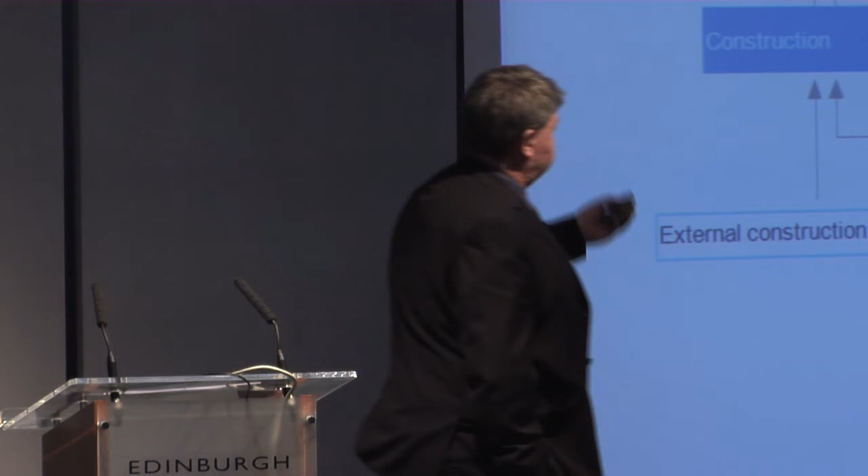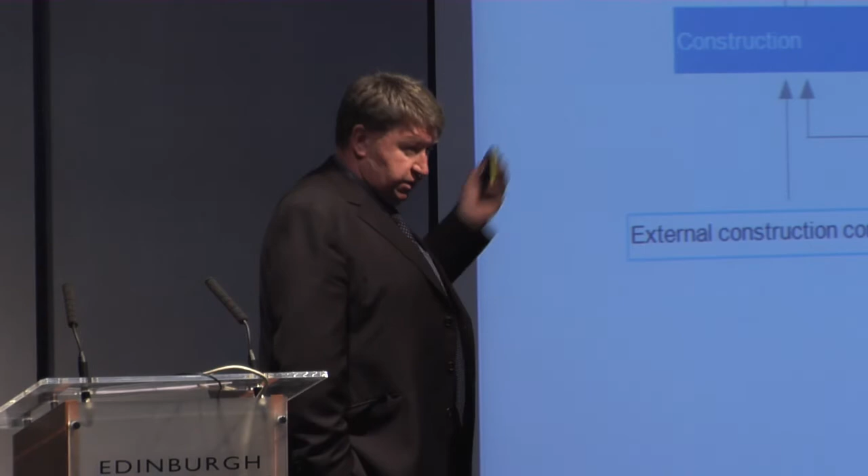And this is how it simply works. This is a simple engine of how Skanska works. Construction, as I said, is 80% of what we deliver. The one good thing about construction is it provides cash, and instead of giving all that cash back to shareholders, we invest it in the 3 development businesses: commercial, residential, and infrastructure. That in turn provides internal contracts for ourselves, so it's like a large engine. We also have external construction contracts which feed the engine. Unfortunately our shareholders also want dividends, so some of the cash goes out. It's a very simple model, but as you can see, we're not only a provider of assets, but also a developer of assets.

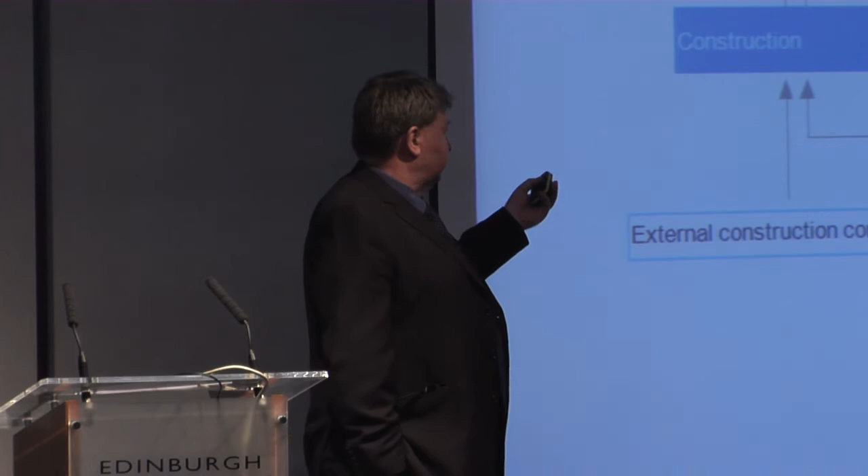Quick flick through some of the large projects we're involved in just now. This is a very quick flick.

Apple's new headquarters in California started 2 years ago, valued at 2.4 billion, architect Norman Foster, due for completion in 2015. A huge focus on energy provision there and actual sustainability. I'll come on to some of the actual methods we use in detail in a few minutes.

As I said before, PFI, the use of private finance in construction, can sometimes be controversial. Sweden decided to embrace PFI, and instead of picking a small health centre, decided to build Europe's largest hospital at 1.2 billion sterling. That's underway, due for completion in 2015. It will be a LEED Platinum project, a huge focus on sustainability, a lot of use of prefabrication, biomass CHP, and it is 17,000 rooms, so a huge focus on construction technology and how it can improve sustainability.

A building we all know, it's the Gherkin. I wish I had a pound for every time that was shown on television. Completed in 2004, an iconic building in the centre of London. Øresund Crossing between Denmark and Sweden, completed in 2000. A little closer to home, the Scottish office down in Victoria Quay. And our last project, the State Hospital down at Carstairs.

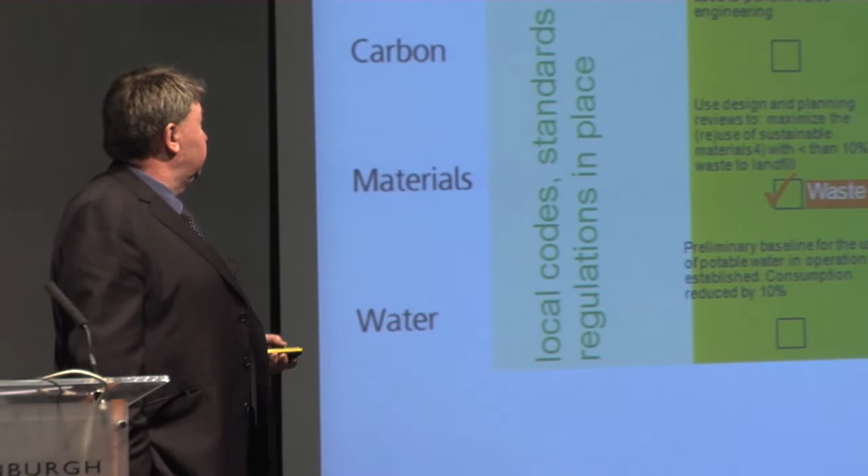So, in terms of measuring sustainability, how do we measure it? We've introduced globally the Skanska colour palette, and it works very simply. We've chosen 4 areas to concentrate on: one's energy use, 2 is carbon, 3 is materials, and 4 is water.

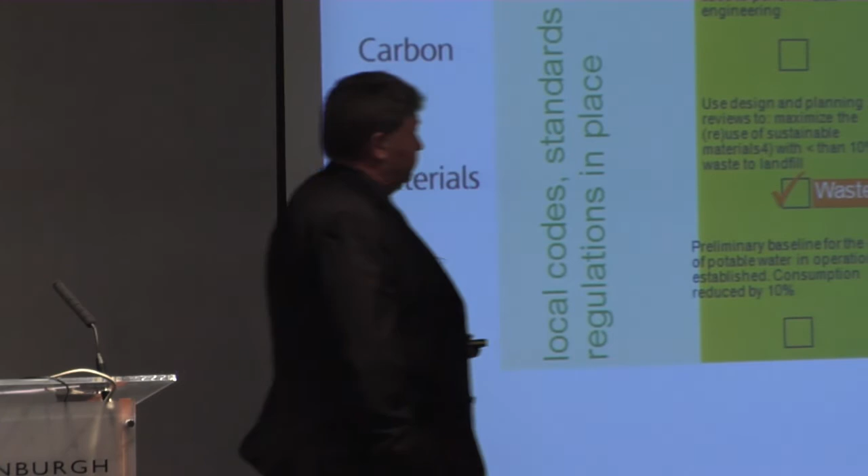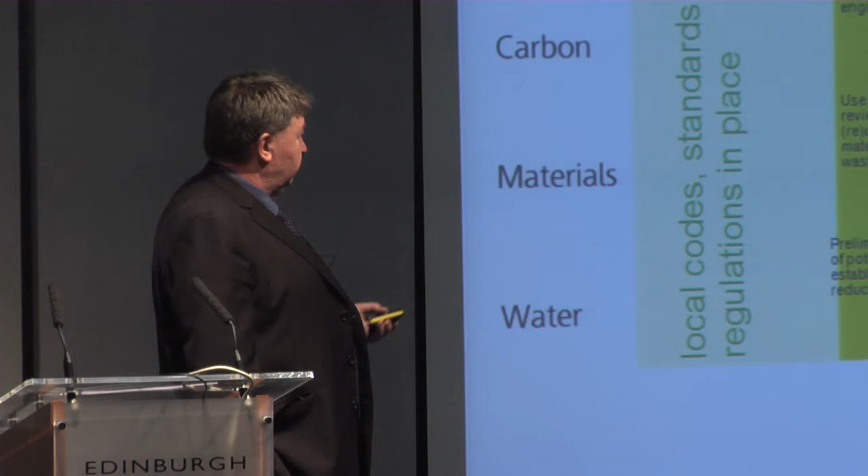If we are compliant and just meet local legislation and regulations, then we are at the left hand of the scale, which is vanilla. Where we are trying to get to is the right-hand side, which is deep green: net zero primary energy, net zero carbon construction, net zero and sustainable materials, and so on. What we do now is measure each one of our projects across these four metrics.

This is a project down in Bristol Schools, where we have achieved better than compliance on the building envelope, better than compliance on waste management, and much more than compliance on actual water usage. So every project in Skanska is measured on each of these metrics. That's hugely important to demonstrate to clients and to our supply chain what sustainability means and how we can use it as a simple metric.

But in Skanska, we buy 80% of what we produce. We procure 80% of the projects that we're involved in, so it's not just down to us. We can put all the metrics in place, but what we have to do is actually educate our supply chain. And it's not just about the actual product, it's also about the process as well. It's about how we get the materials to site, the amount of work on site, and where people travel from.

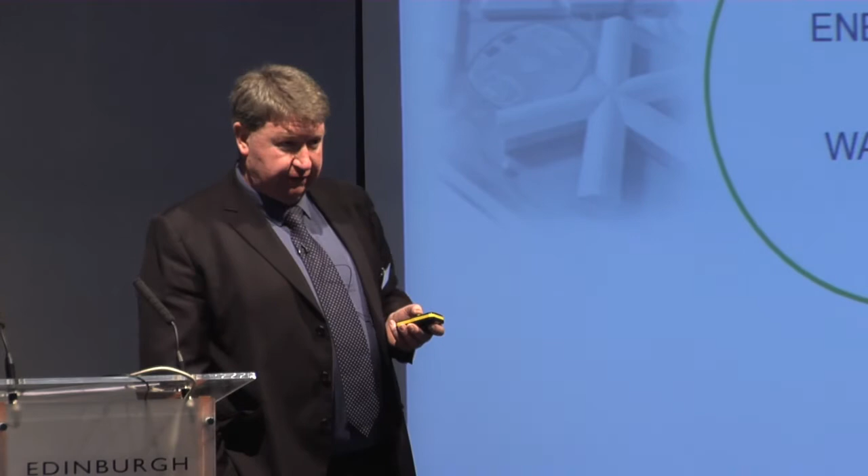On every one of our projects now, we try wherever we can to procure locally. One, it keeps the investment in the area. Two, it's good for corporate social responsibility. But three, it is hugely important for the environment as well. Why would you go and procure from the south of England for a project in the north of Scotland, with the transportation costs and all the risks of getting the materials there on time? Why not procure locally? So on all of our projects we are now trying to procure within a 200-mile radius if at all possible - employing staff and labour within 200 miles, but procuring within 200 miles as well.

It's a very serious ambition. Sometimes it means we take raw materials into the area and set up flying factories to provide the manufacture there as well. It is an ambition - we haven't achieved it on all our projects. We have a large prison in Peterhead at the moment, and an example of that is all the precast panels came from the Orkneys and were floated into Peterhead Harbour, where in the old days we would have bought them from Peterborough and driven them up the M6. Looking at it, it has cost us less money and it has actually reduced our risk.

So as I said at the start, going green doesn't have to cost money. It's about doing the simple things right. Everyone in the room will no doubt know about sustainable timber - we've always been sourcing from sustainable resources. We are now extending that to quarry products. We're looking at waste, at providing more actual waste materials on site and reusing waste materials. We're looking at recycling, and as I said before, we're looking at the local supply chain.

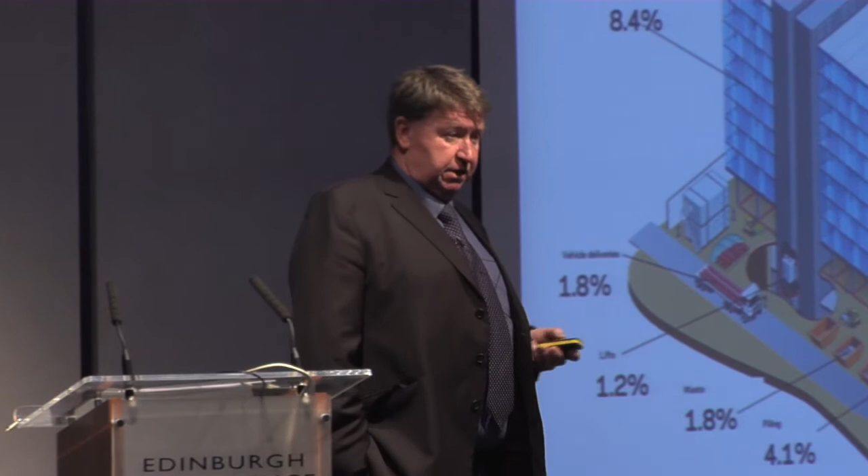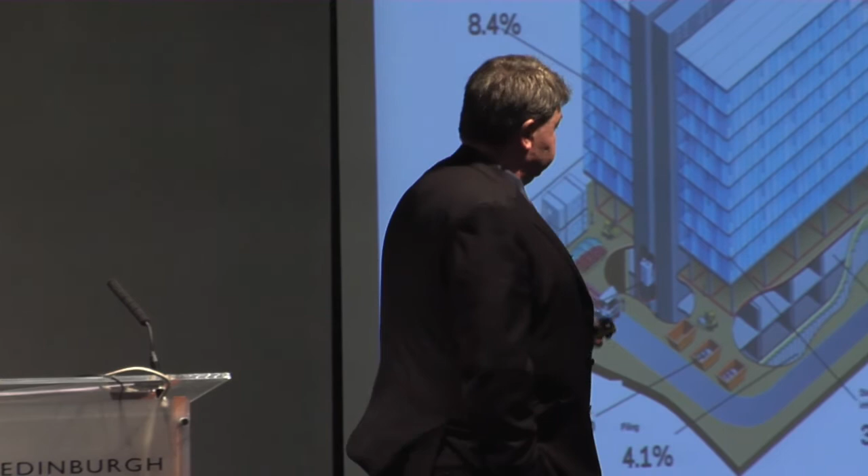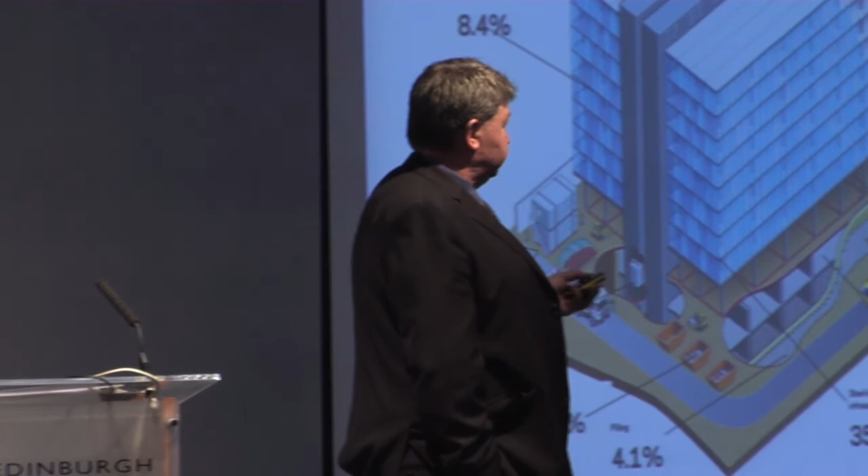Embodied carbon - this is looking at all the materials that come on site and now monitoring the actual carbon footprint. In the past we put a cost plan together; now in all our projects we are looking at embodied carbon - how much carbon is actually used to produce the materials on site. Here we've concentrated on the percentage of the total building, and if you look at the concrete, we've looked at the actual carbon produced in terms of concrete manufacture. John MacArthur's going to talk about that in more detail at the end of this session. So we're looking at the energy sources, the raw materials, and now at the total carbon embodied in all of our structures - not just carbon in production or manufacture, but carbon at source.

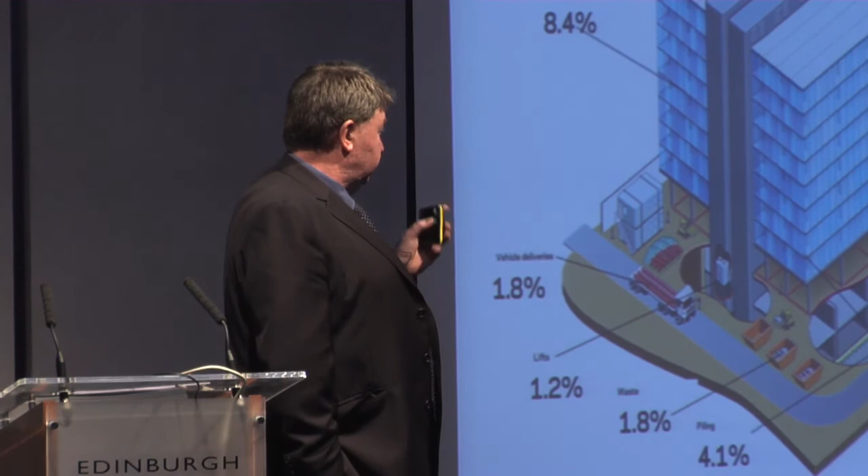So how do we move on and actually look at getting to deep green? Well, there are a number of accelerators. First thing is we have to challenge our clients.

And that is an example of actually educating our clients.

Form of contract: we have a lot of adversarial forms of contract in the construction industry. There are new forms of contract such as NEC that allow the contractor to be involved at the early stages along with the supply chain, and that's when you can make a change, make a difference. It's about getting involved day one, in the brief, in the early design, and designing sustainability in - don't have it as an afterthought.

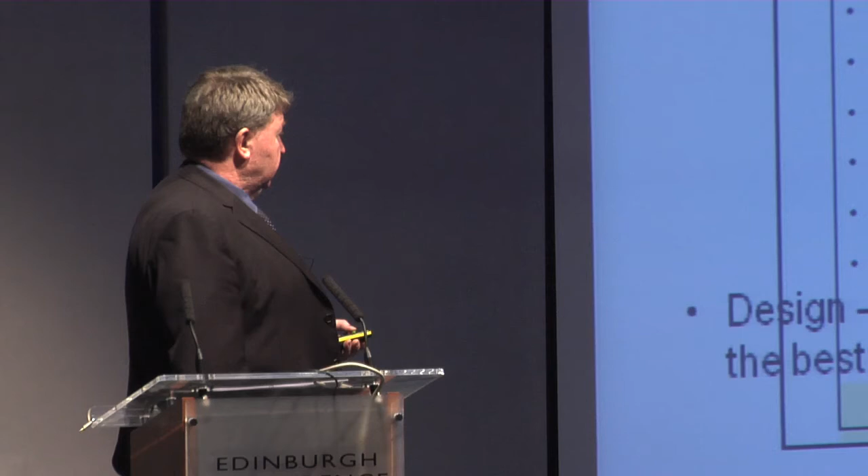And last but not least, it's about design - actually considering the local environment and using the best technology. And now I'd like to look at one aspect of that, which I think Fred's going to talk about later in a bit more detail, and that's BIM.

So what does BIM stand for? BIM is Building Information Modelling, and there are two definitions. One, it's a method to describe the building - its spaces, structures, components, materials - with essential information and properties. The model is purely a container for the information. But the other thing, which I think is more important, BIM can be described as a collaborative approach to making sure that the right information arrives at the right place at the right time.

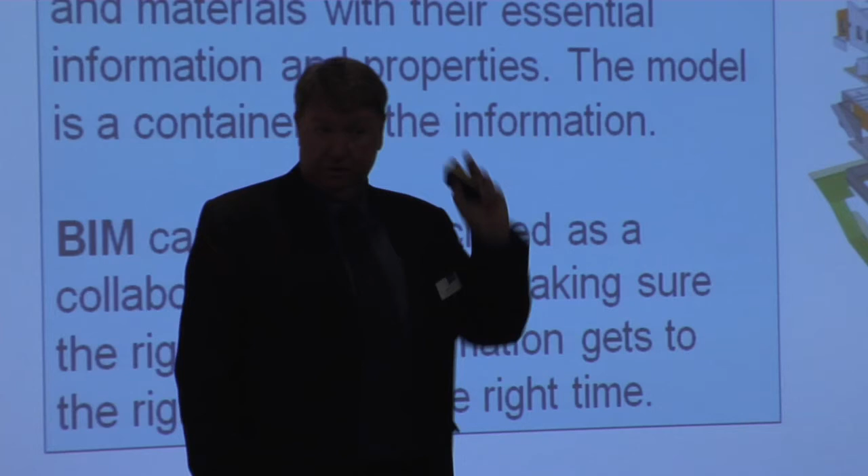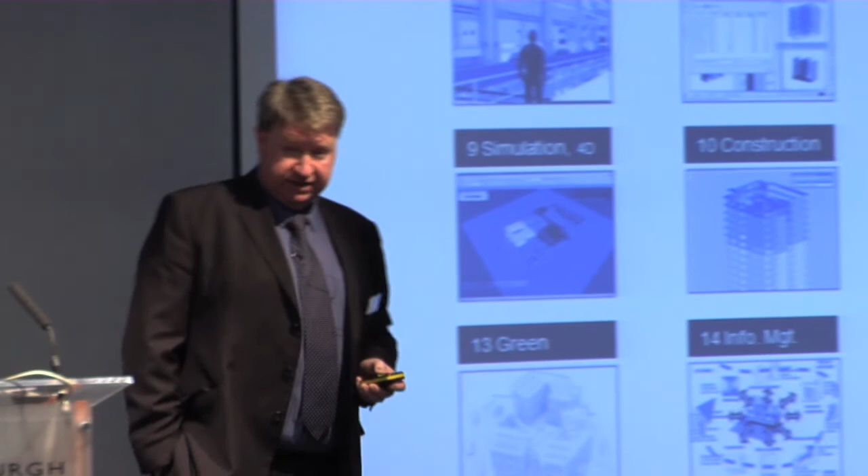Anyone have a guess in terms of BIM, how many Ds we are now working on? You obviously have 2D, 3D, now 4D. Any thoughts on what dimension we're now working on in the construction industry? Sorry? 7? Close - we're now working on 16D. That's 16 dimensions to a BIM model.

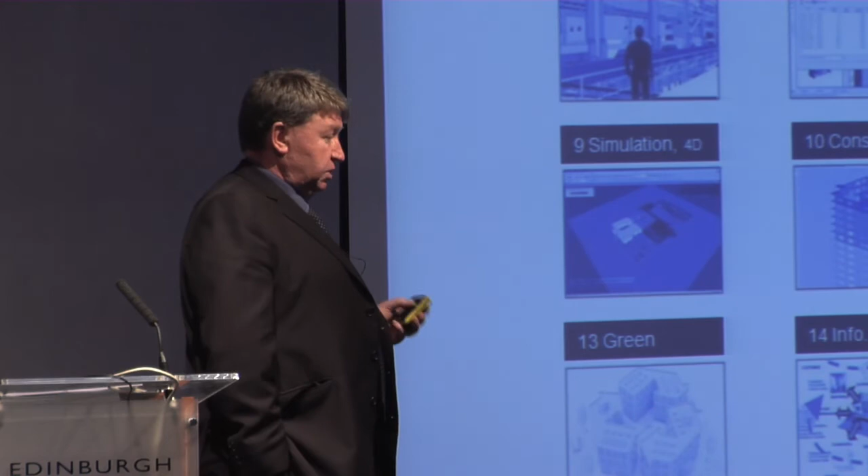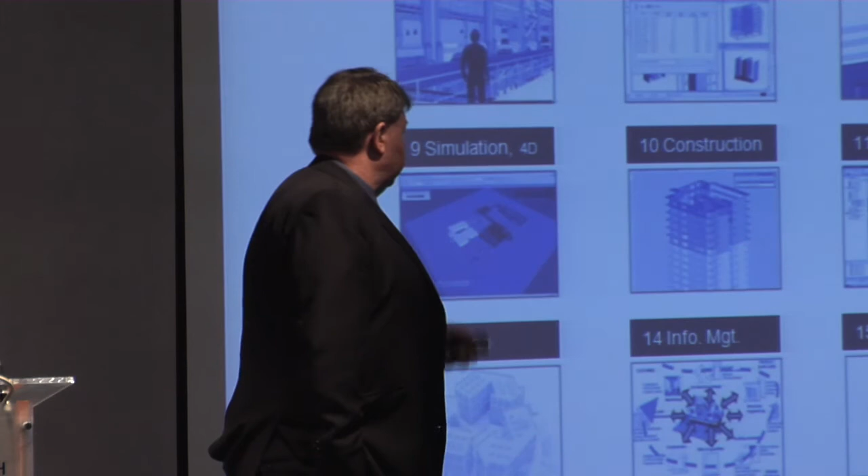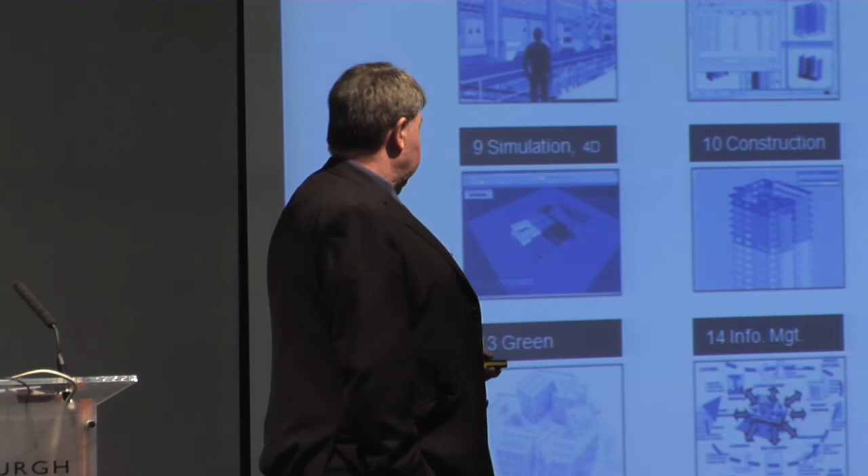So you have your base BIM model, and then you can attach to that model all these attributes. You can look at the design and how it's developing. You can look at the commercial aspects, how it's being procured, safety, clash prevention, 4D simulation, fly-throughs, artist impressions, construction in terms of buildability. But you can also look at green aspects of the building, life cycle, and FM.

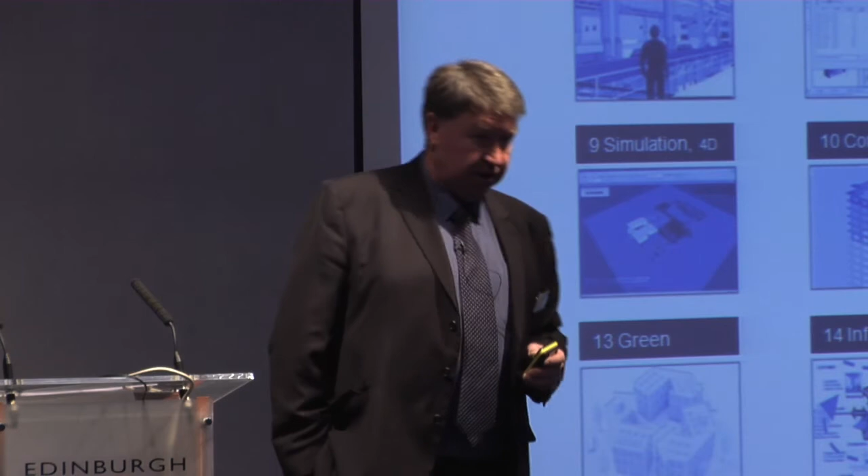On all of our projects now, we have a BIM model, and on every project we actually produce a full 16D BIM analysis. So on every project, we look at every aspect of the project using the base 3D model.

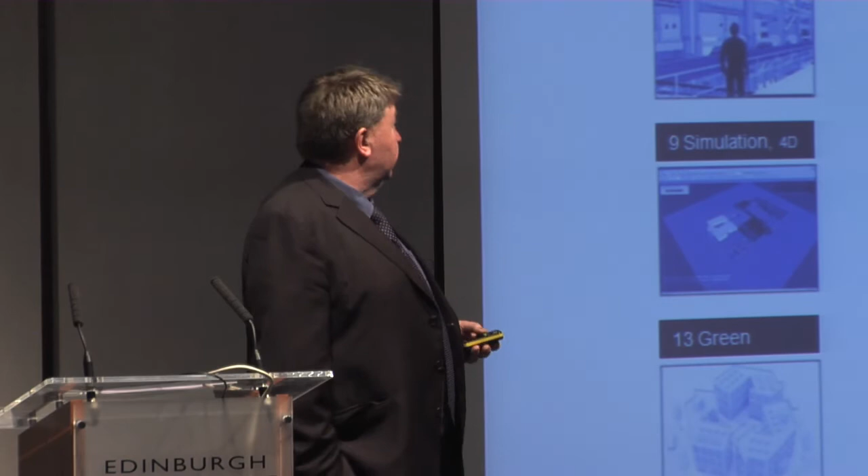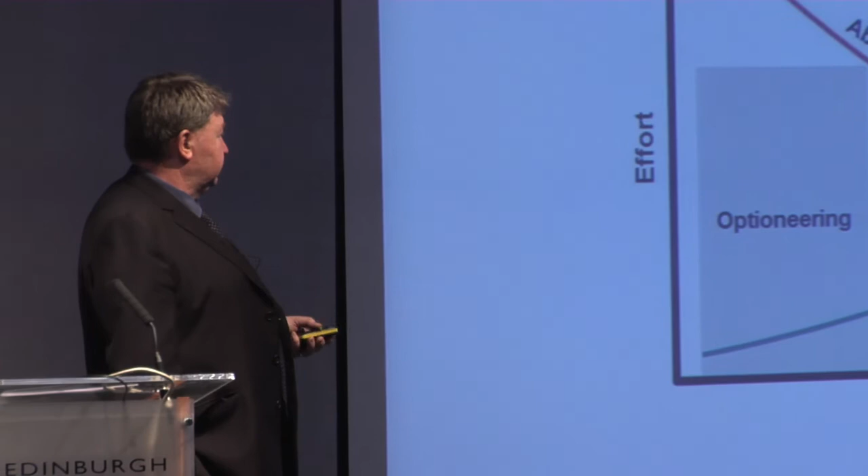Why do we do this? As I said at the start, it's much easier to introduce sustainable measures at the start of a project, during optioneering. As the project progresses, the ability to change becomes less, the cost increases, and the actual cost of change becomes hugely influential on taking it forward.

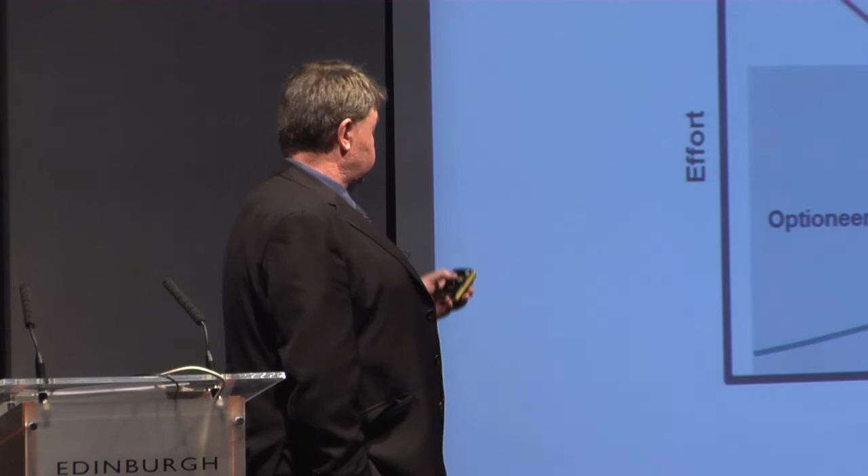So, a quick flick through how BIM can help us, and then a quick video of how Skanska are adopting BIM. BIM, or Building Information Modelling, has started to become a well-recognised term within the construction industry.

At Skanska, BIM is seen as a new way of working, enabling a structured flow of information throughout a project's life cycle. Applying the principles of BIM has proven to make a significant positive impact on many core activities on a project, from early client engagement and planning during pre-con through to design, commercial and construction management, and then operations.

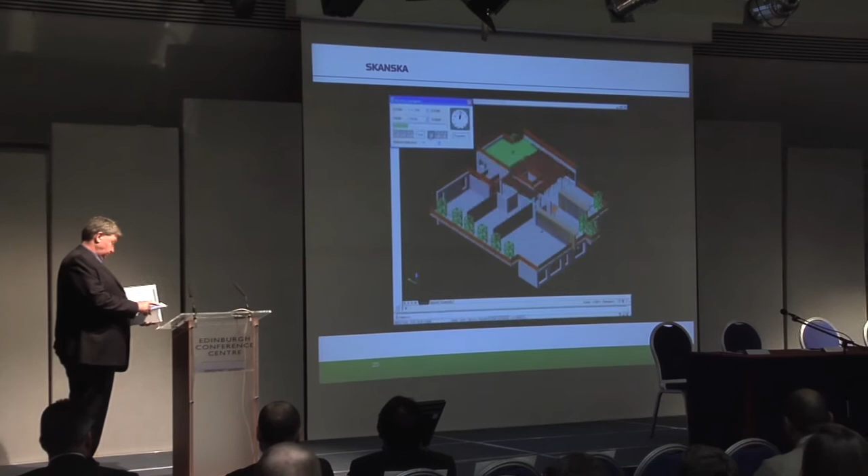The Skanska Group recognised the potential early and took the bold decision that every design and build project in Skanska from 2009 onwards should adopt the principles of BIM. The objective: to make Skanska more capable of winning and successfully delivering projects throughout the world.

Skanska UK has been seen as an early adopter of this new way of working. We have already been using BIM principles on some of our projects for a few years now, and within the UK 2015 strategy, BIM plays an important part. BIM is acting as a catalyst for change, the Skanska way.

So what is BIM to me? BIM provides us with the cornerstone for the design, planning, construction and operations of our projects. I see BIM as enabling us to advance our sustainability credentials and speed up our journey to deep green. And I believe that we are just now starting to see the benefits that BIM can bring to our projects and to our organisation.

BIM supports our aspirations to deliver our clients' expectations safely, more efficiently, more predictably, both in the construction and the whole life phases of the projects, to enable us to outperform on every job, every time.

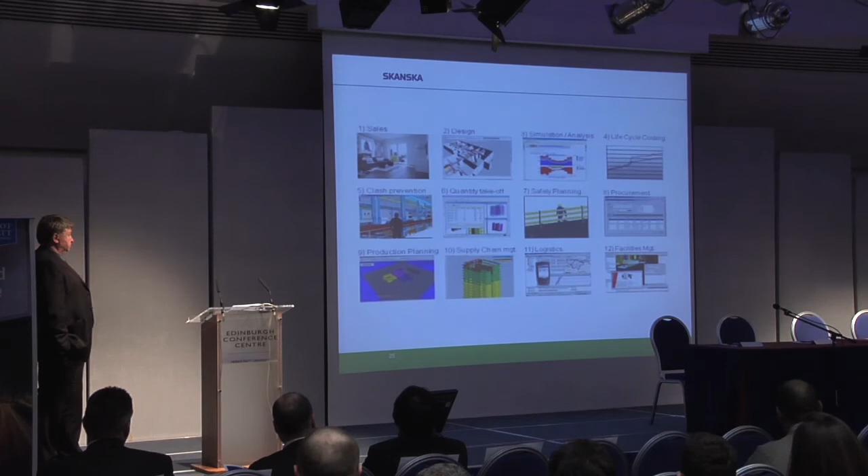At Skanska, we currently structure BIM into 12 applications, spanning from powerful visualisations that support our bids to a tool that enables more efficient facilities management. We can now start to see the first practical examples of how various applications of BIM have enabled different operational units to enhance their performance.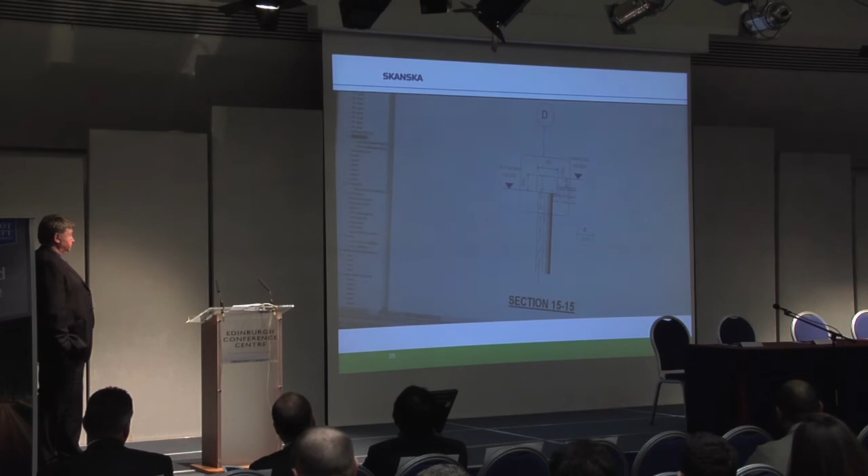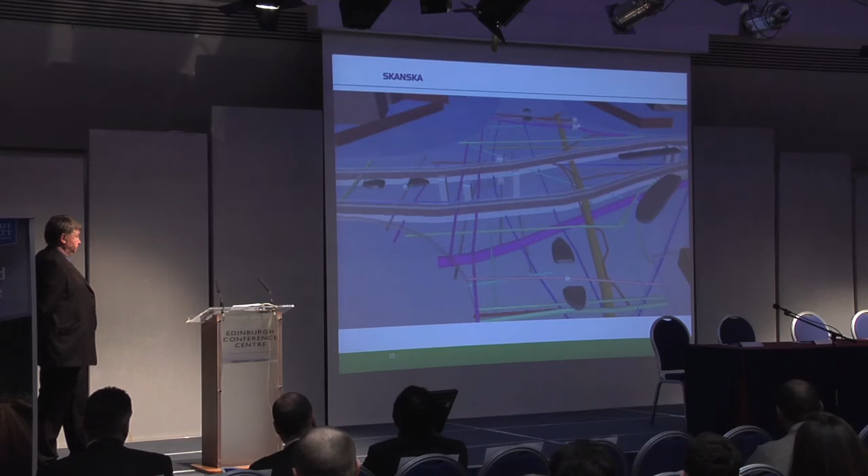The first story is from Utilities, who applied elements of BIM to a recent bid for a complicated services installation along a busy road just west of London. Using the latest survey technology, they were able to scan the ground and capture accurate information relating to existing services. The existing services were then converted into BIM data, combined with the proposed new services, and the scheme was optimised for cost, construction works, clashes, logistics, etc. The model gave them the opportunity to present a highly competitive and green bid containing multiple options for the client.

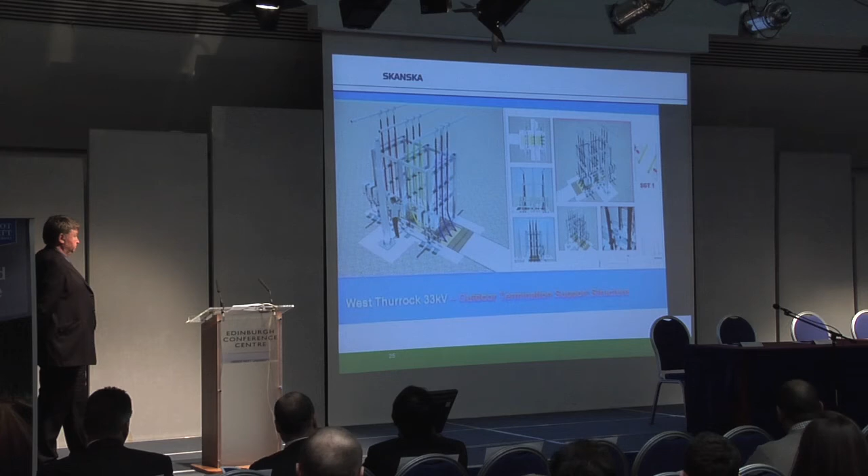I knew about 3D modelling, and I felt there must be a better way of doing design on site and understanding the problems we face with clashes in cable installations and utilities. I went to the BIM team, and they were very helpful. They provided me with a solution to overcome the problems in the form of BIM.

We also use the images to plan where we're going to do our trial holes, because the image is very powerful, but there's no substitute for actually having a look in the ground. Having these images really ties down where the trial holes will be best suited to be excavated. Of course, this saves congestion—as you can see, it's quite a busy junction—saves money, and ultimately helps us plan the job. So yeah, we can see nothing but good points for this BIM.

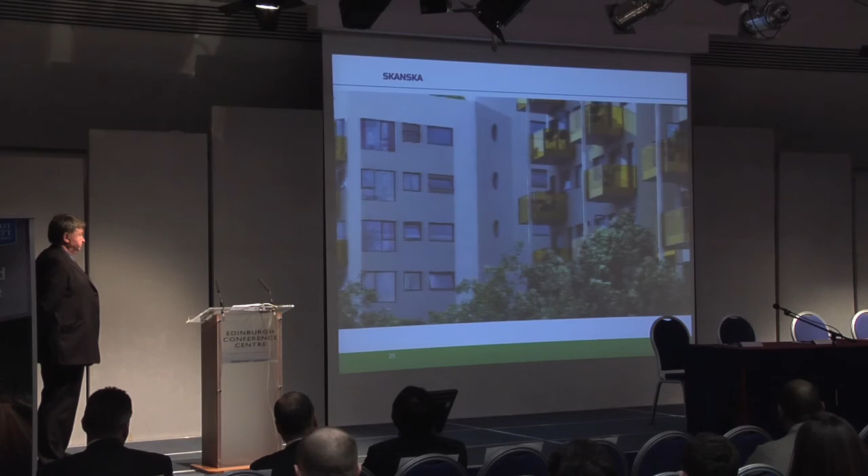The next BIM example comes from Communities, who have started to build their first Moderna Hus project in Brixton, London. The project is the first of its kind in the UK, transferring best practice from Scandinavia on how to build green and affordable homes through a more industrialised approach, standardisation and a high degree of repetition. Communities have taken these principles to the next level by applying BIM on all activities throughout the process.

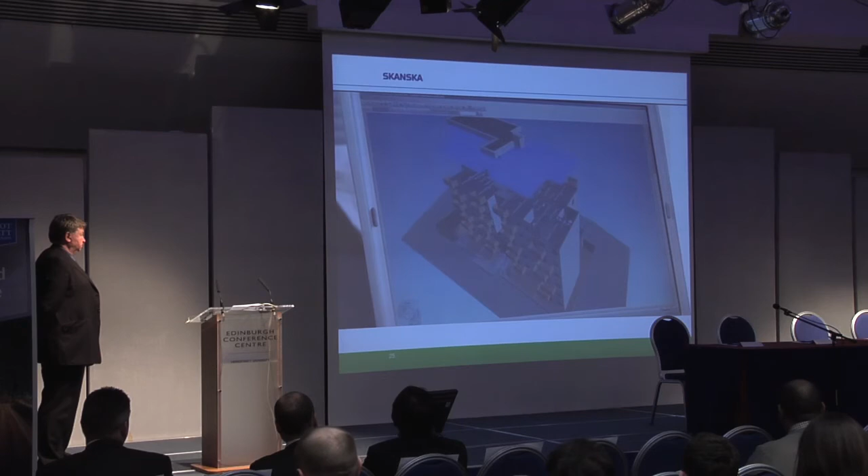Design is managed into a central BIM model and quantities taken off. Programming and production planning is achieved via the same source of information, which saves time and costs. The client can sign off the design in a 3D virtual environment, and the project is delivered right first time.

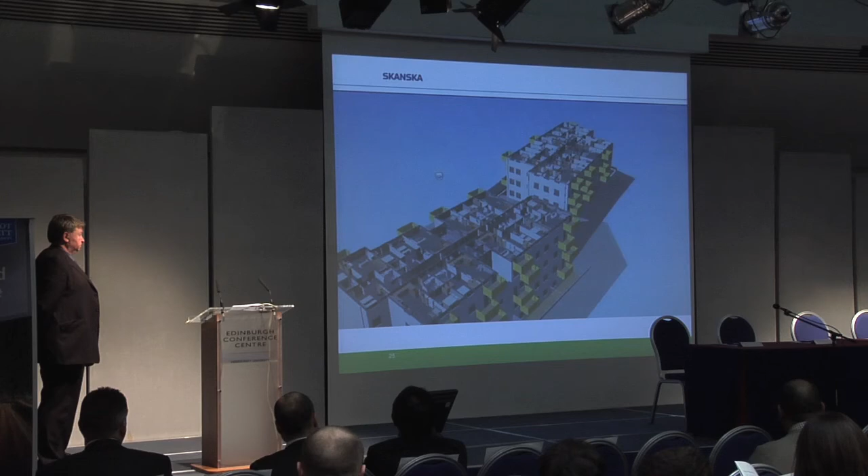One of the biggest benefits for me in designing using BIM, which we've experienced on Coldharbour Lane, has been the consistency in coordination of the design. We have noticed that we'll have to introduce new transfer panels in order to cover the loads coming from the 7th floor.

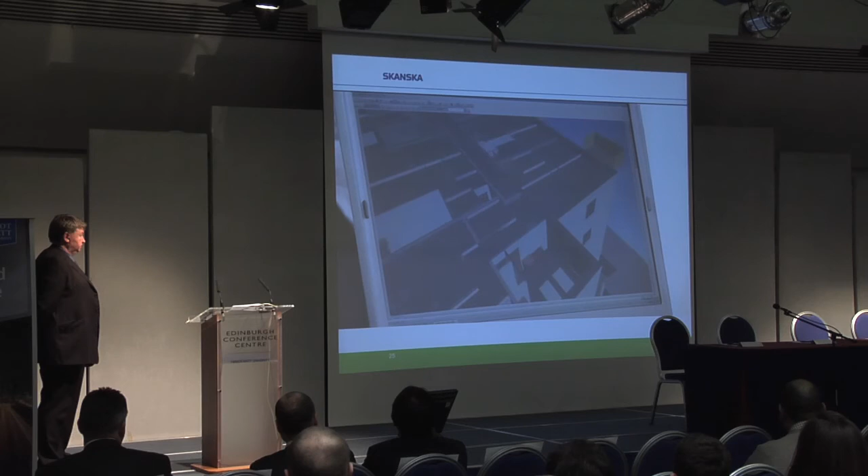Can you make use of the model to see the consequences it's going to have on your apartment layout below? Yeah, we can do that quite easily—we can add in a new internal wall. The customer benefits from 3D visualisation because they can clearly see what they are going to get, and they can also understand and accept design changes and options.

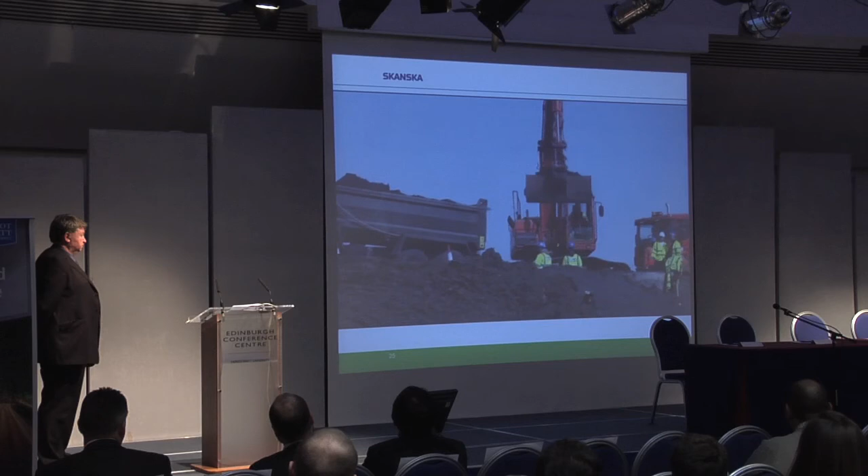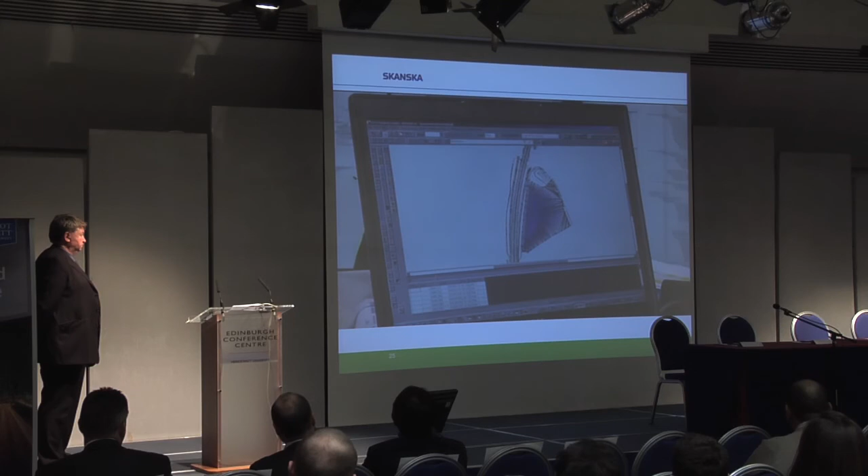Our Civil Operating Unit gives us the next example on how BIM can support a project during construction. The widening of the M25 is a large and complex project with tough timescales. By utilising intelligent 3D information direct from the BIM model, plant on site becomes more accurate and overall productivity is improved. A further positive effect of this new way of working is higher engagement with the workforce.

Once I've changed part of the design, for example this slip road, if I've amended it, I've got to issue it to the relevant teams. I can see the real benefits in the information modelling - we call it electronic information. I've just received an email notification through Business Collaborator from Martin, so I'll prepare that data for site use. It's normally something that'd take 2 to 3 days for a turnaround.

So let's go outside. We're going to give the card over to the operator now, which is Joe. Joe, here's your BIM card. Cheers, Mark. Thank you. Get stuck into the model, give it a go.

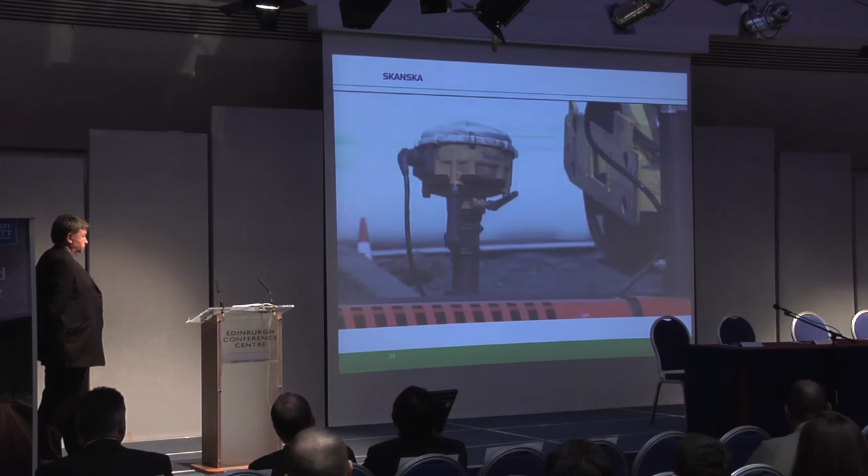Right, the data's been loaded onto the machine now. The machine drive is just to start, but what makes this different between this machine and others is the 2 GPS sensors on the back - that makes it a 3D machine. If you look at any other machines, they won't have it. This machine is going to work as a master, and all the other machines will follow as slaves. That's the biggest difference. But as you look around, no batter rails or profiles anywhere.

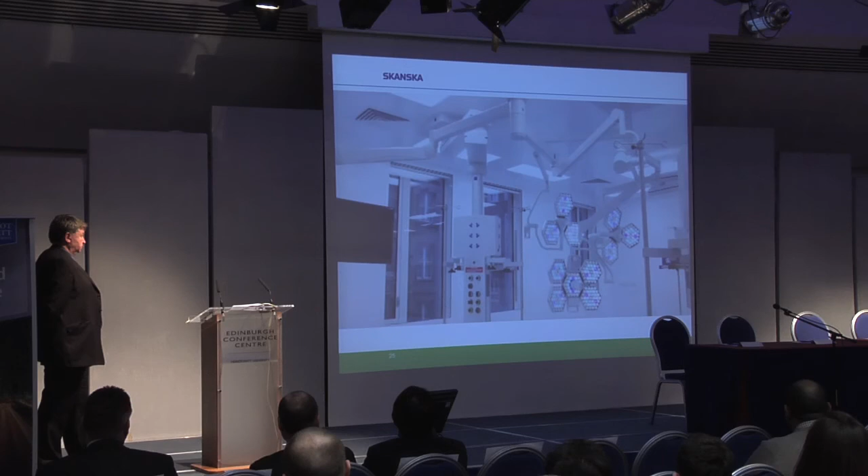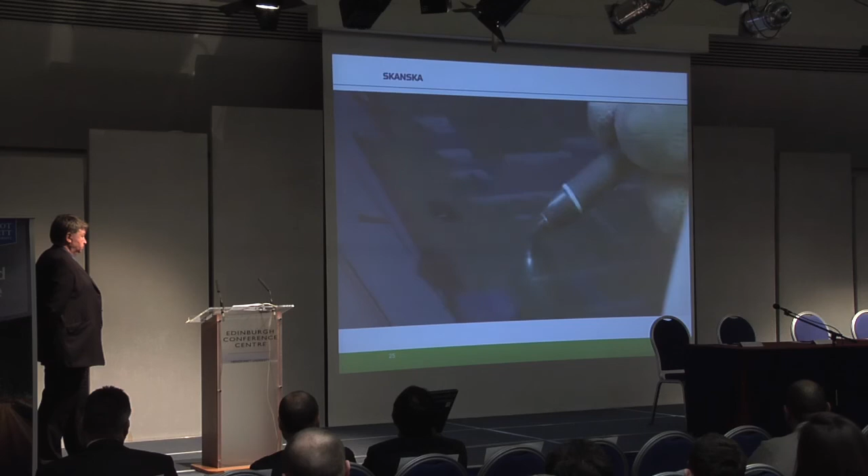The final BIM story comes from the Public Operating Unit. Their BIM work at Royal London Hospital has been recognised outside of Skanska, and the team have received a number of industry awards. The latest innovation is the use of a tablet PC to provide a construction site toolbox of applications for progress monitoring, site diaries, and to support an efficient and correct verification process, all based around the BIM models. Practically, this means that BIM has moved from the design office to the construction site. High-quality information in the handover also benefits the Facilities Services Operating Unit, which is highly dependent on this to operate the building in the most efficient way.

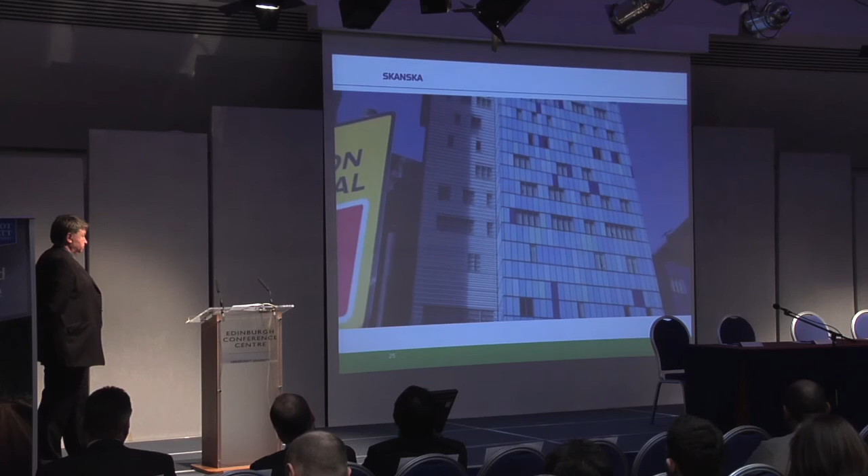I'm here in the atrium area carrying out my final compliance checks. I'm using the tablet PC, which is a site link to the BIM database. The BIM has enabled us to outperform our room completion targets. I personally believe the tablet PC can and will orchestrate our overall goals in achieving 100% compliance with 0 defects.

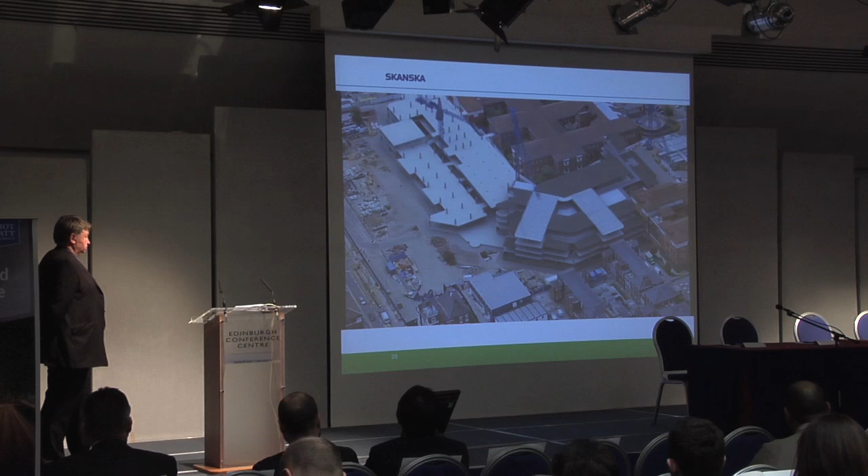We have seen 4 examples showing how BIM is currently being implemented in various parts of Skanska UK and in various stages of a project. Every project has its own story to tell, but all demonstrate the same potential to establish a new way of working that also enhances project engagement. The examples show how BIM can help us create more competitive bids, better coordinated design, more efficient project delivery, and happier clients at handover. In short, benefits that will help Skanska to outperform on projects every time. The examples shown today are just a few examples, and across Skanska there are currently many initiatives underway that will shortly have their own stories to tell on how BIM has made their projects more successful.

I'm just conscious of time, and as the only contractor actually here today, it would be a fallacy if I was behind programme. So I'd just like to conclude by saying that's just one example of how technology has been used in the construction industry to improve efficiency, drive out waste, but more importantly respond to the sustainability agenda and climate change. Other things we are looking at currently are a whole host of research on materials - that's looking at no carbon concrete, reuse of foundations, and also energy walls. But I'll save that for another day.